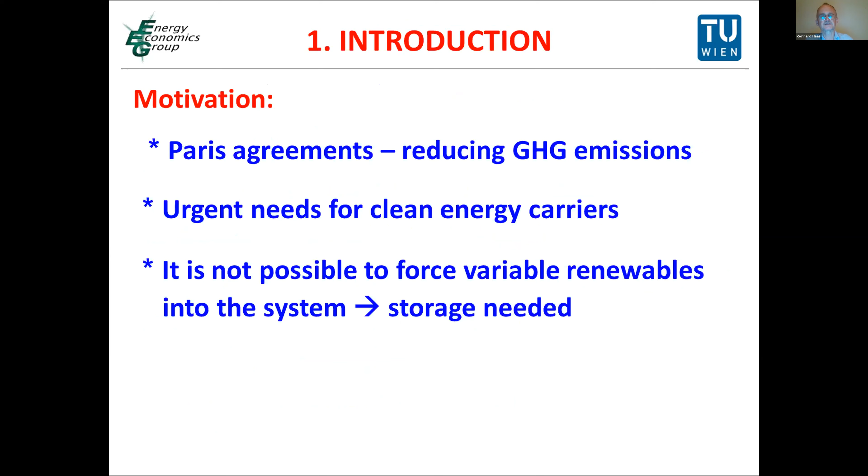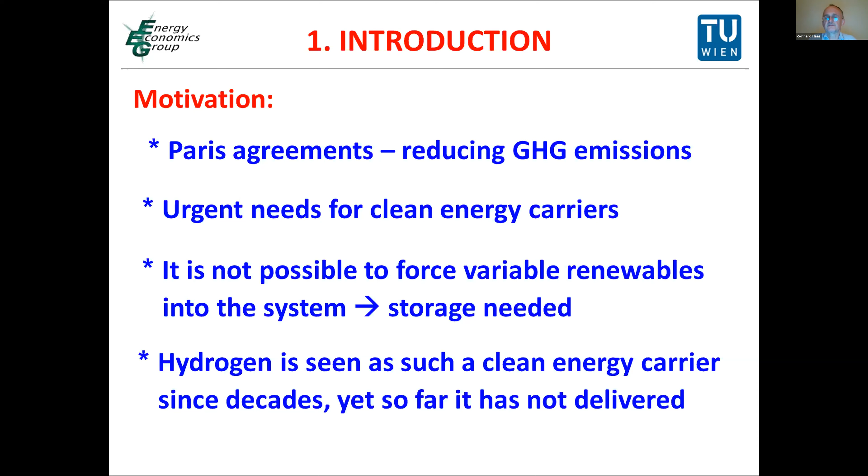The motivation is clear. We have the Paris agreements reducing greenhouse gas emissions, and there is an urgent need for clean energy carriers. We have, on the other hand, currently a strong development of variable renewables in the electricity system, and here storage is needed. And hydrogen has been widely seen as such a clean energy carrier for decades, but so far hydrogen has not delivered.

So the core objectives: to analyze the prospects and the impediments of the hydrogen-based system, to identify the role of hydrogen to integrate even larger amounts of variable renewables, to analyze how efficient technical solutions based on hydrogen can be, that is to say, what is the overall efficiency in different hydrogen energy systems, to investigate economic prospects, and, as said, also the environmental benignity of various colors of hydrogen.

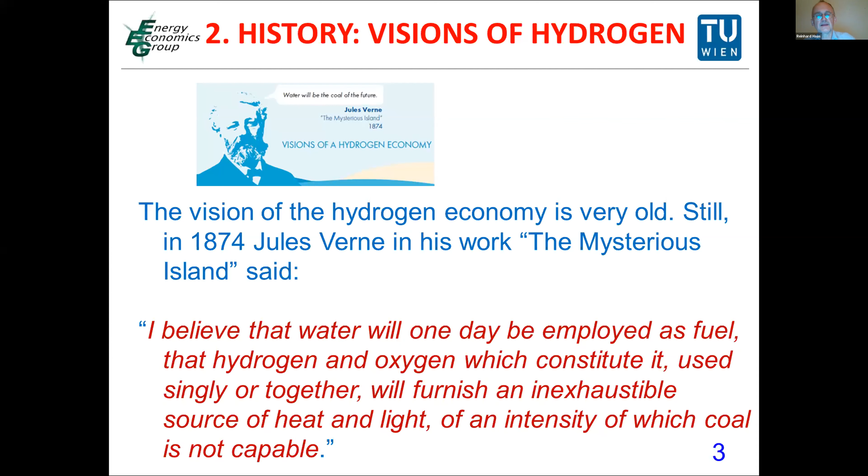The first fuel cell vehicle was a farm tractor in 1959. In 2011, there were already about 100 fuel cell buses worldwide, and in 2019, we had a global fuel cell vehicle stock of 13,000. And I would say this is not really a success story.

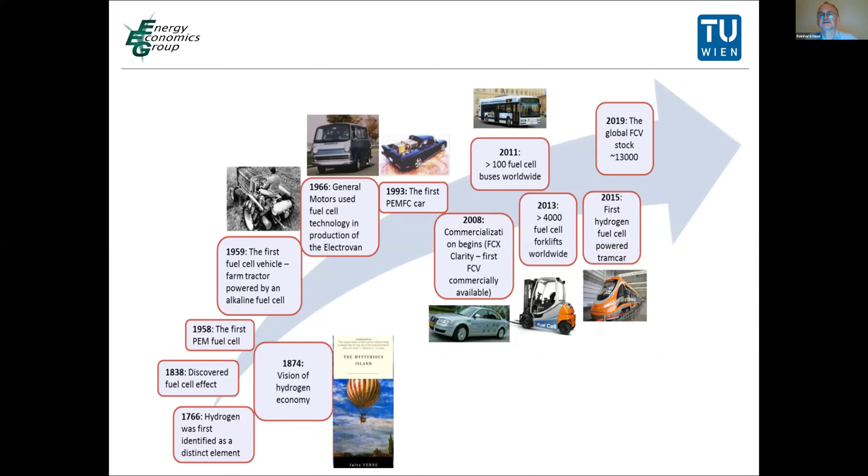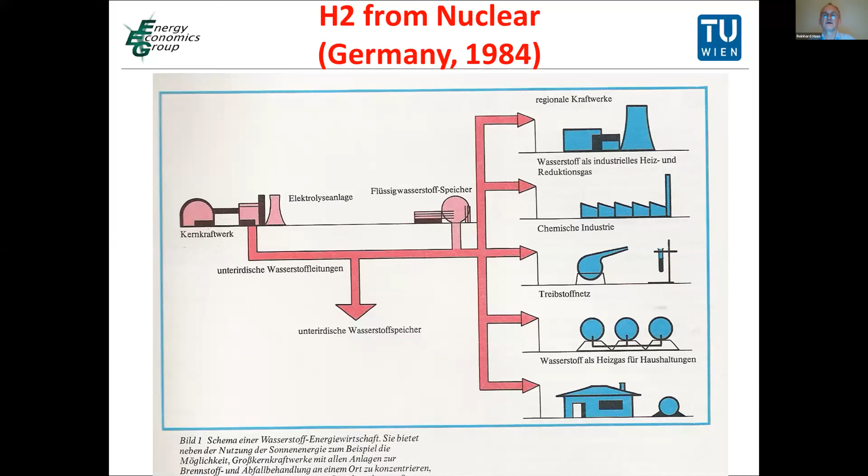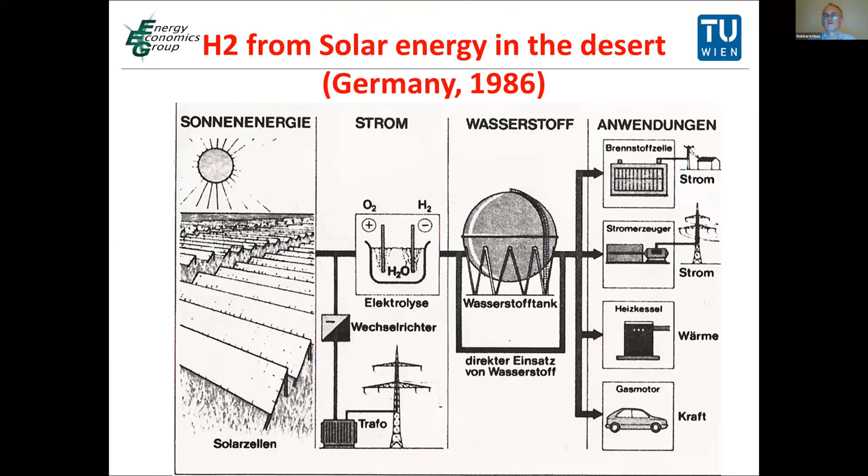The vision of the hydrogen society, for example in Germany, already in 1984 started with hydrogen from nuclear. The idea was that there's too much electricity generated in the nuclear power plants and they could use the electricity in electrolysis, and the further discussion is the same as today. And already in 1986, there was an additional idea to go to the desert, for example in Northern Africa, produce electricity there, produce hydrogen and transport it, for example, to Germany.

Another interesting idea came from the European Union. In the year 2003, they created a roadmap starting in the year 2000 with a fossil fuel-based economy heading towards a hydrogen-oriented one by 2050. There is, of course, a small mistake, because coal, fossil fuels, is a primary energy source, and hydrogen is an energy carrier which has to be produced from other primary sources.

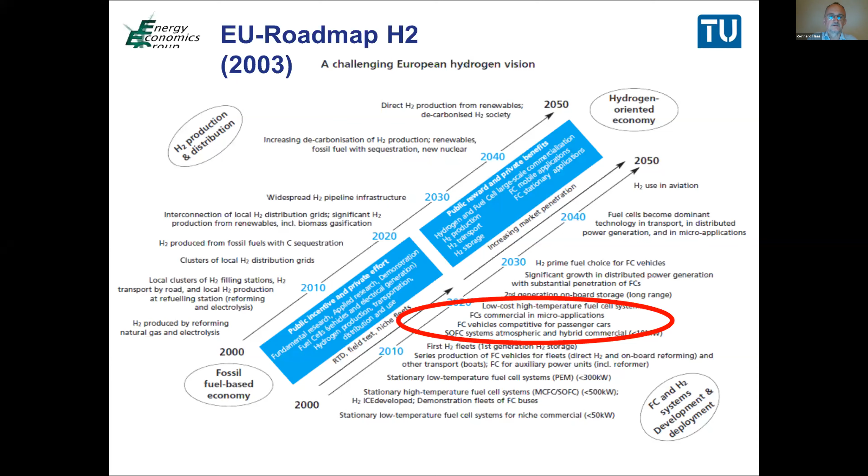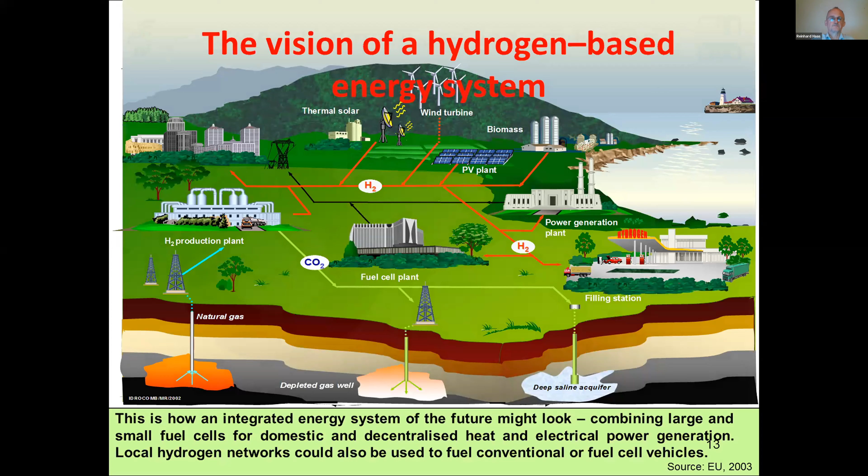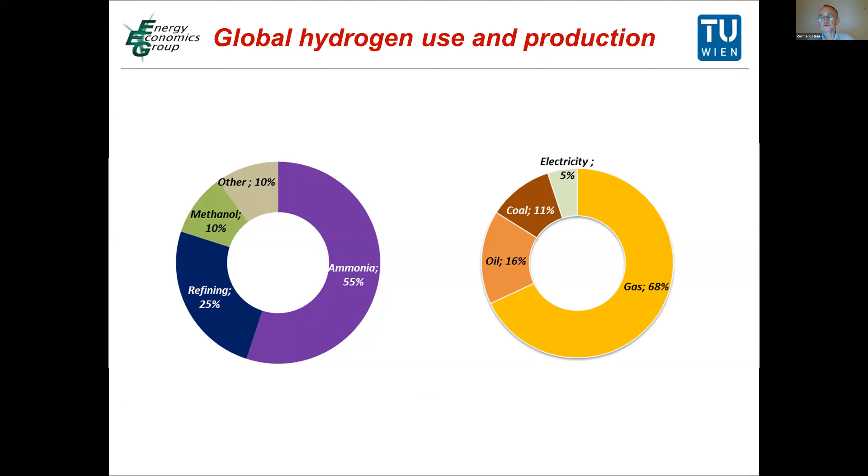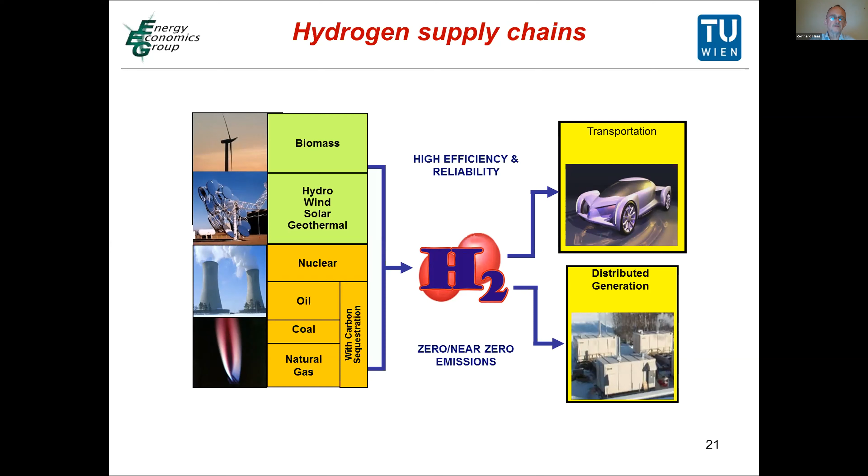Today, hydrogen is mainly used in refineries and for producing ammonia, and about 70% of hydrogen is produced from natural gas, only 5% from electricity. So let's now look at the hydrogen technologies. We have to bear in mind that we have technologies for hydrogen production, for hydrogen storage, and finally distribution, application in services. So we can see here we can produce hydrogen from biomass, other renewables, but also from nuclear and from fossil fuels with carbon sequestration.

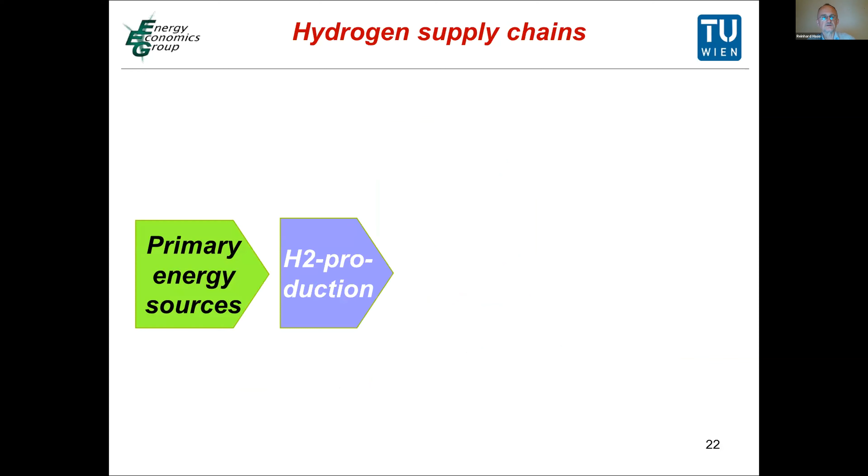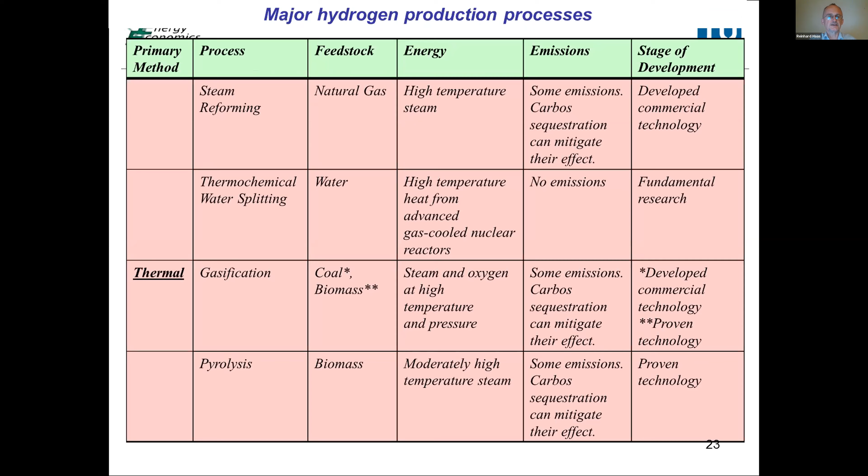That is to say, if we discuss the technologies, we have to bear in mind this whole chain from production, transport, storage, and also the applications. Just a rough overview. You need not read what we have on this table. It just shows that there are many possible processes. We have thermal processes such as steam reforming, gasification. We have electrochemical ones, such as electrolysis, photoelectrochemical, and there are also biological processes possible.

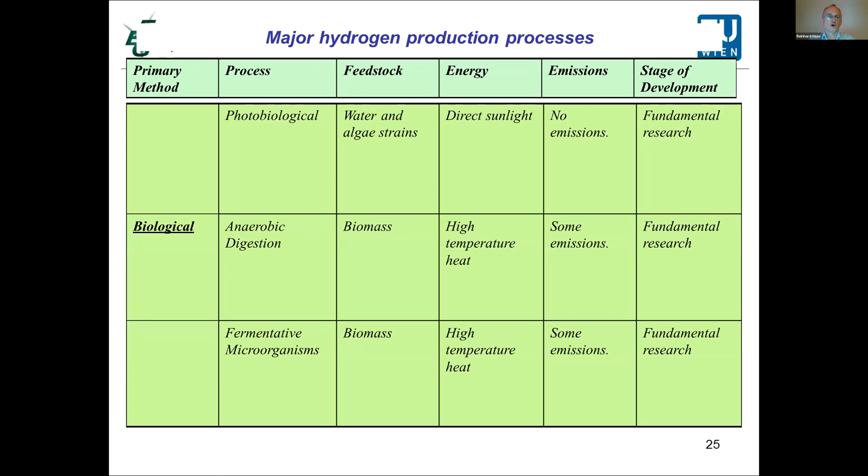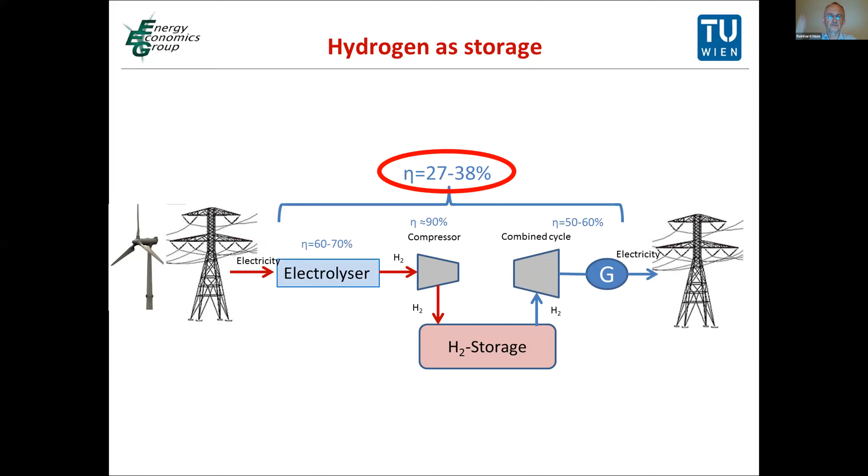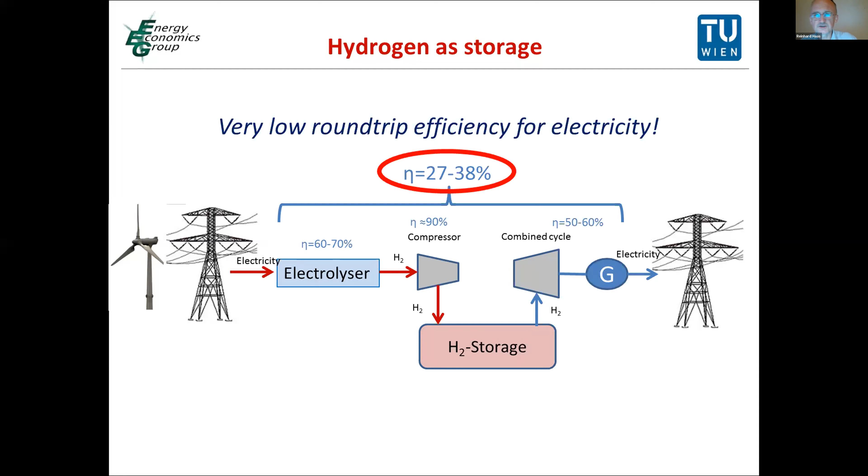Let's now look, first example, hydrogen as storage for electricity. In an electrolyzer, we produce the hydrogen and put it by compression in a hydrogen storage. Then we have the opportunity for re-electrification of this hydrogen. If we look at the different efficiencies in the system, finally we end up at about 27 to 38%, which is, let's say, at most modest. So round trip efficiency for electricity in this case would be rather low.

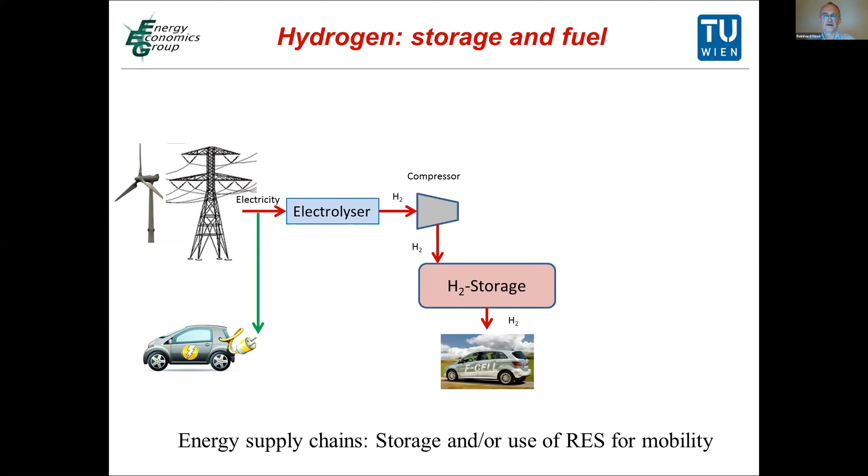Another opportunity is in transport. Aside from using the electricity directly for electric vehicles, we can have the hydrogen storage and drive the fuel cell vehicle. And finally, we also have the opportunity to do something that is called methanization of hydrogen. We produce methane for mobility, for example, or for electrification. Again, in this case here, we have an efficiency which is even lower than before because we have an additional conversion step.

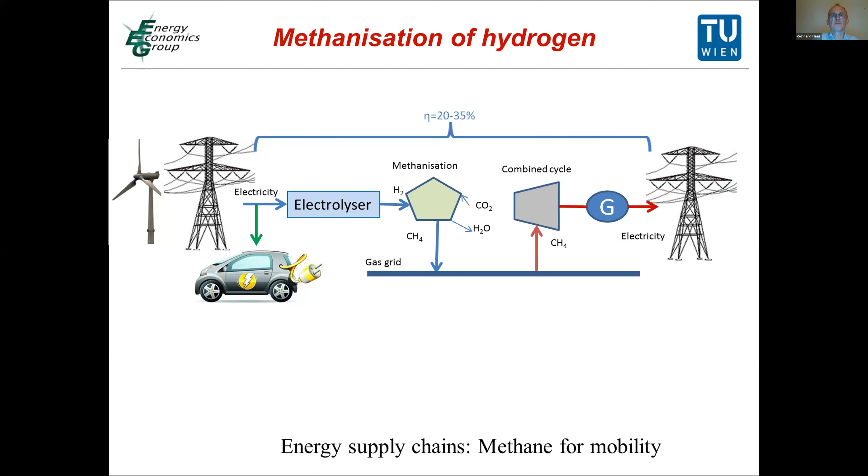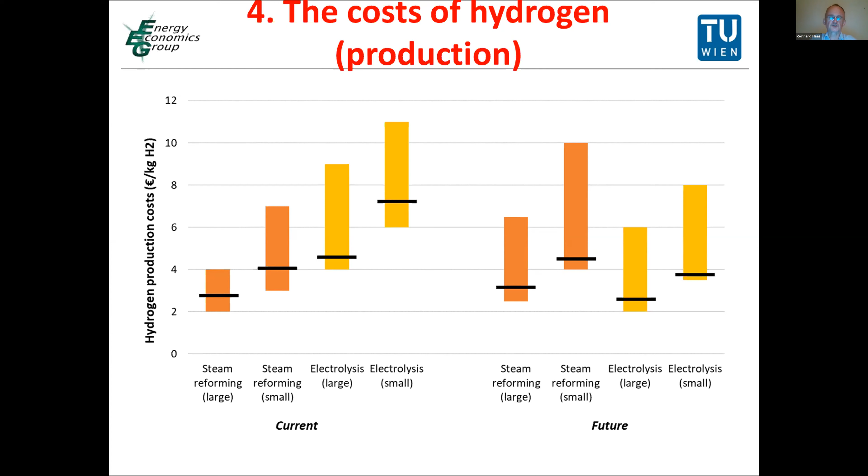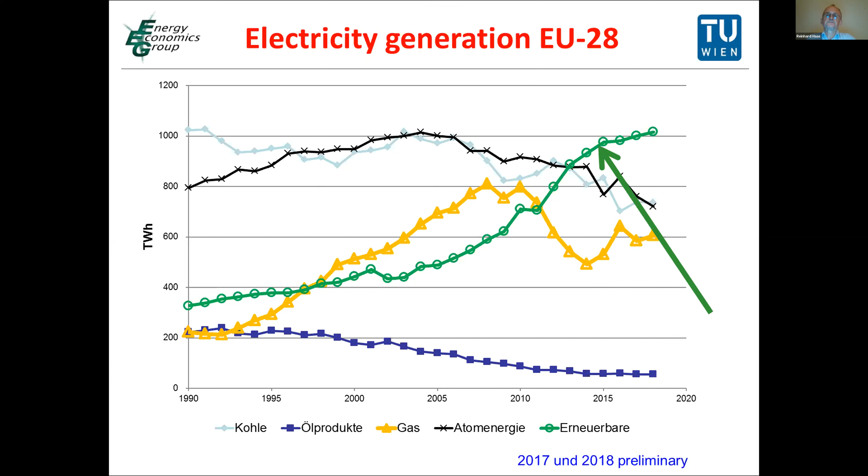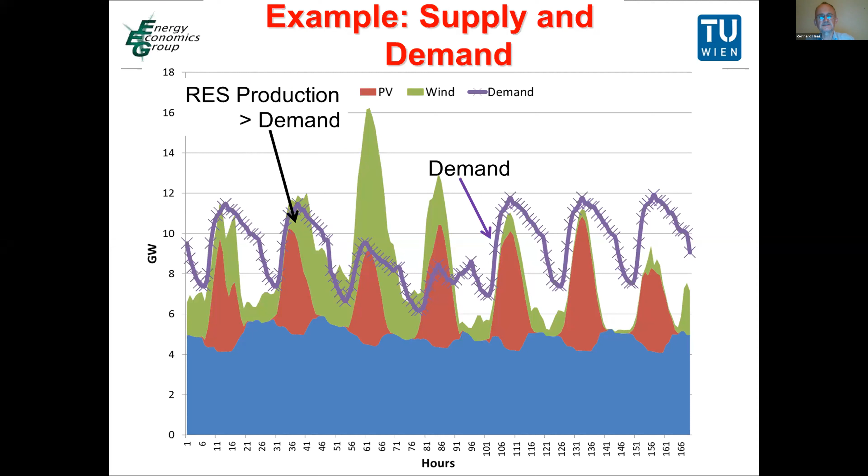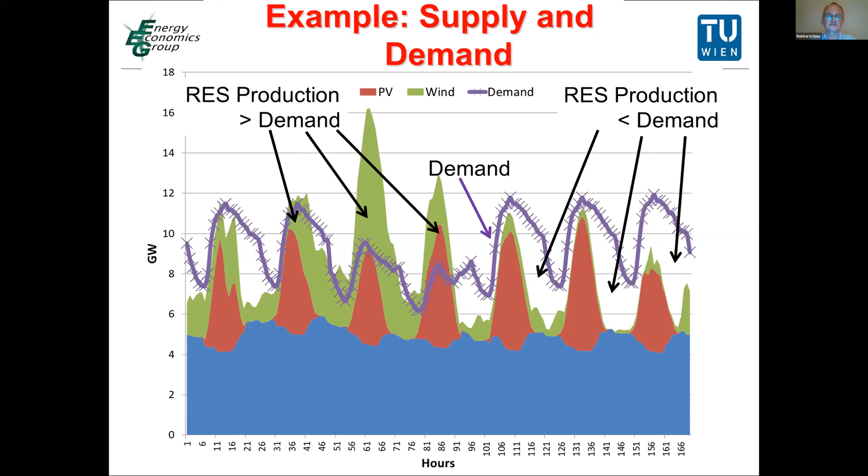But we have already heard in several other presentations, if we have the fluctuating production, then the picture is as shown here. Over a week, in this case for 2030 in a scenario, we have demand and we have times where the renewable generation is higher than demand, and we have other times where renewable production is lower. So we have to find for a week a certain storage.

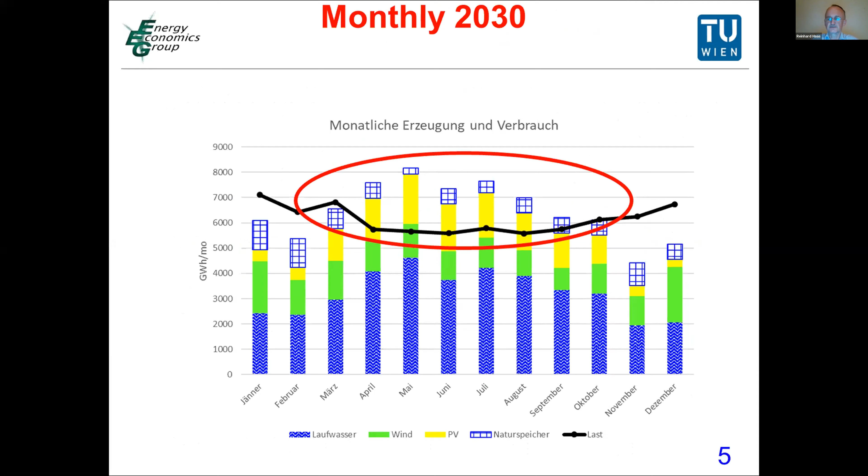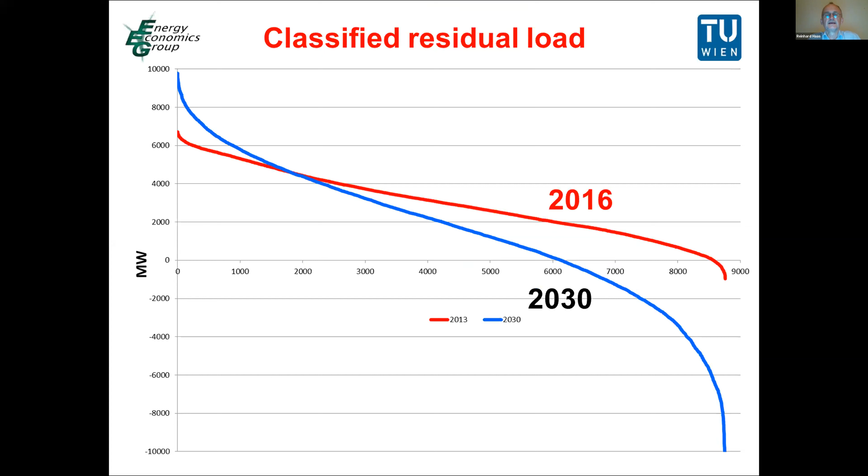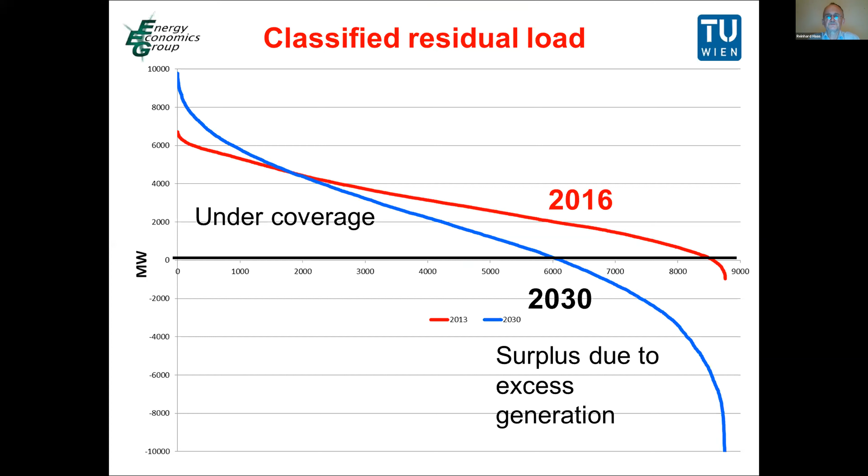If we classify residual load over years, we have here the classical profile for 2016 and an expected profile for 2030. We have here under coverage in some periods of time, and in other periods of time we have a surplus due to excess generation. And the question now is, how do we use this surplus?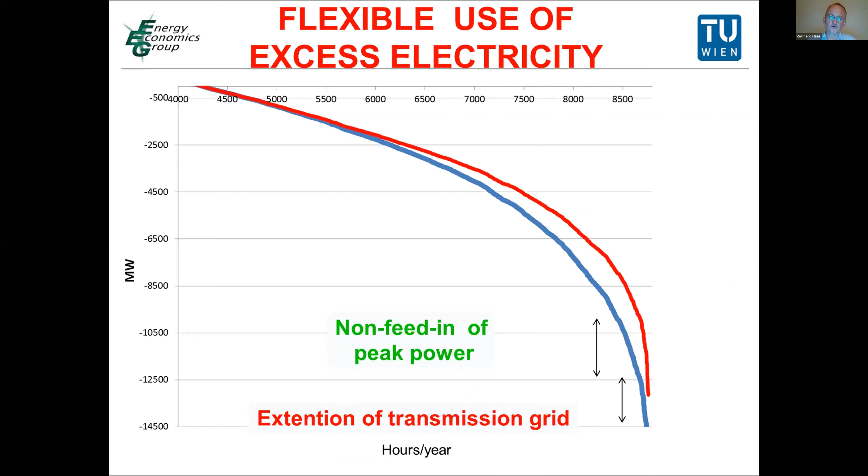We have several options. As also already said, we discussed the extension of the transmission grid. This will flatten demand as well as the generation curve. Then there is a possibility of shedding some peaks of plants, for example, of wind power plants. And we have maybe rather low prices. Then due to direct marketing, some of this excess electricity will be sold.

Technical demand-side management as well as the smart grids could help to balance from one voltage level to another one. And then here we have maybe the use of hydrogen storage.

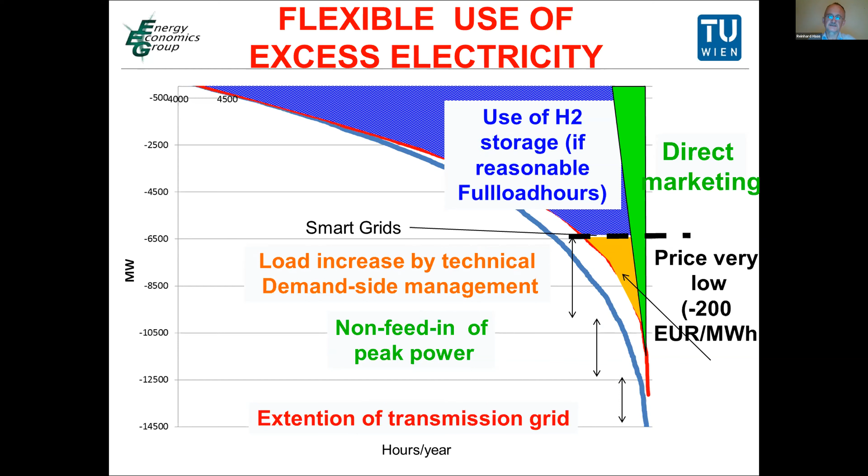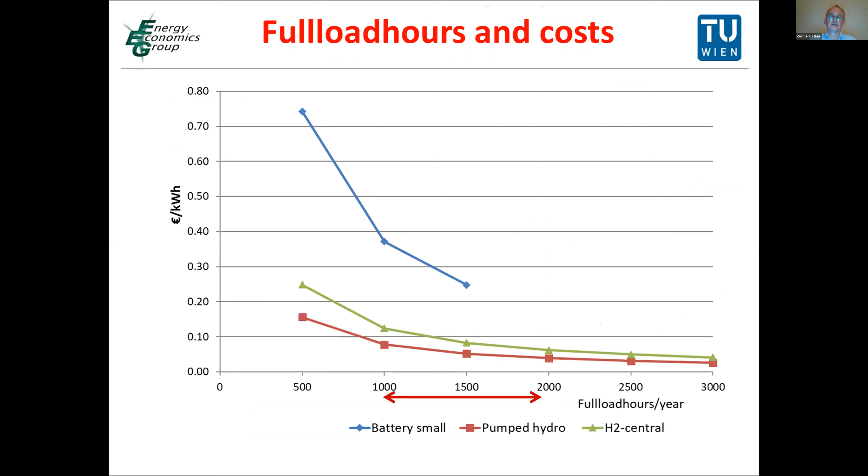But now we come to one of the very crucial points. It is full load hours. If you think about economics, the costs highly depend on the number of hours you operate the system. So here we have on the horizontal axis the full load hours, and we have different types of storage.

Usually battery storage has lowest operation times, especially decentralized ones, and for hydrogen we would expect at least, let's say, 1,500 to 3,000 full load hours. And in addition, this shows that at very low operation times of, let's say, 500, we have correspondingly rather high euro or dollars per kilowatt hour generation cost.

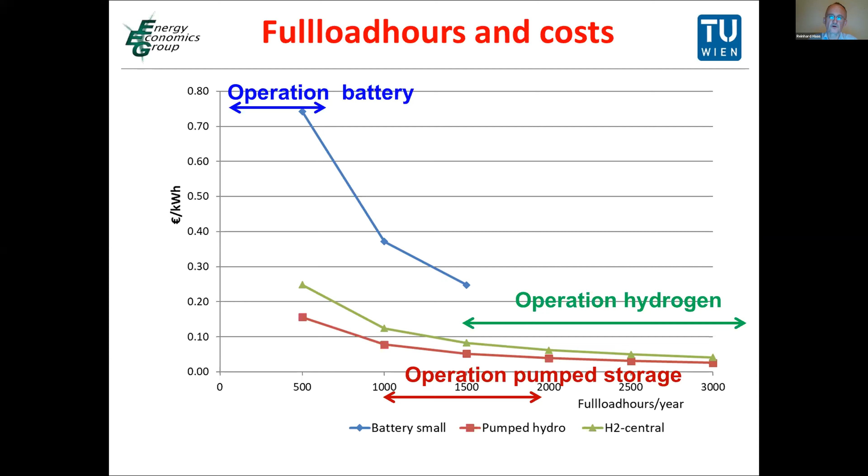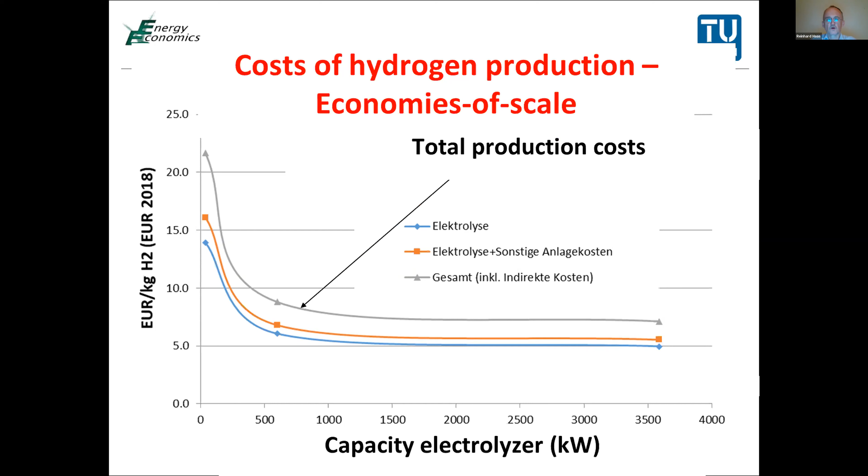And the gray curve here shows total production costs depending on the capacity. That is to say, it's not just the electrolysis, it's also other components of this system.

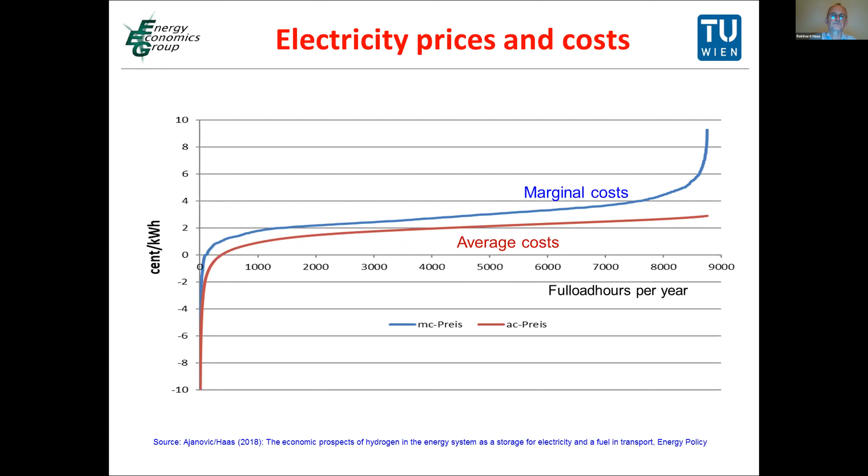It also is different from year to year, but we can now calculate the average costs, which are the average of the prices below a certain number of full load hours. For example, here at 4,000 full load hours, we can identify electricity costs of on average 2 cents per kilowatt hour. And I think there's not much difference between US cent and Euro cent.

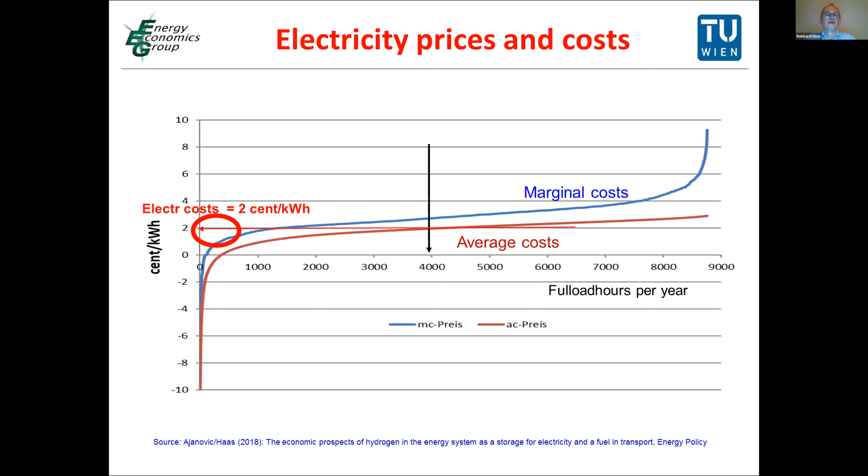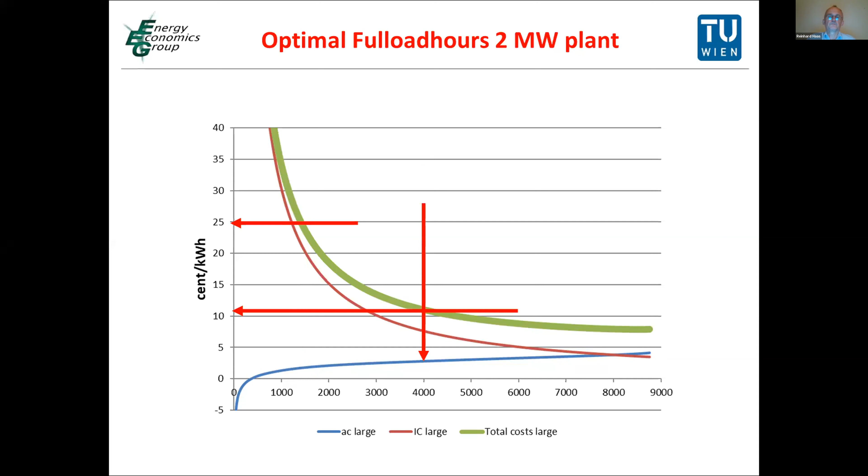If we just have 1,500 full load hours, the costs are 25 cents per kilowatt hour. If we would manage to come to 4,000 full load hours, the costs would only be about 10 cents. So we can see we have significantly lower costs in the case of more full load hours.

Now we can try to identify the economics based on these costs for car transport. And what we see from this slide is the fuel cell vehicle is on the top. Below we have battery electric vehicles, and we have gasoline internal combustion engine at the bottom.

What you see is that the fuel costs of hydrogen are actually in the average of everything, but the capital costs are still the major problem. So the economics in passenger car transport mainly depends on the investment costs.

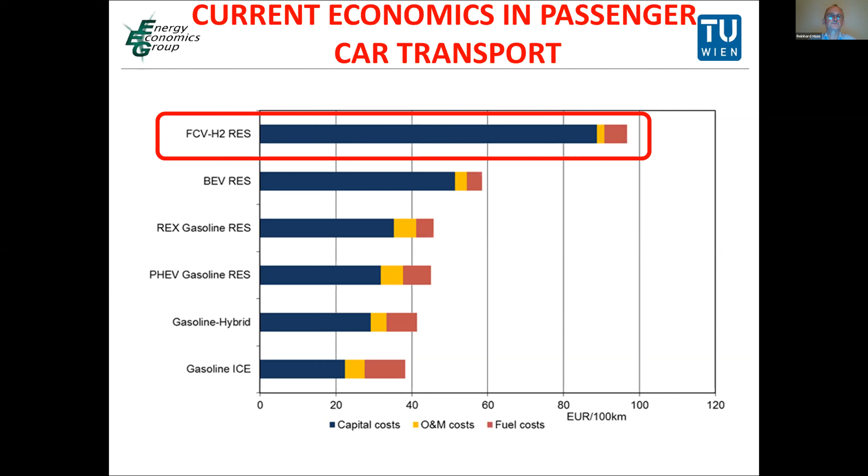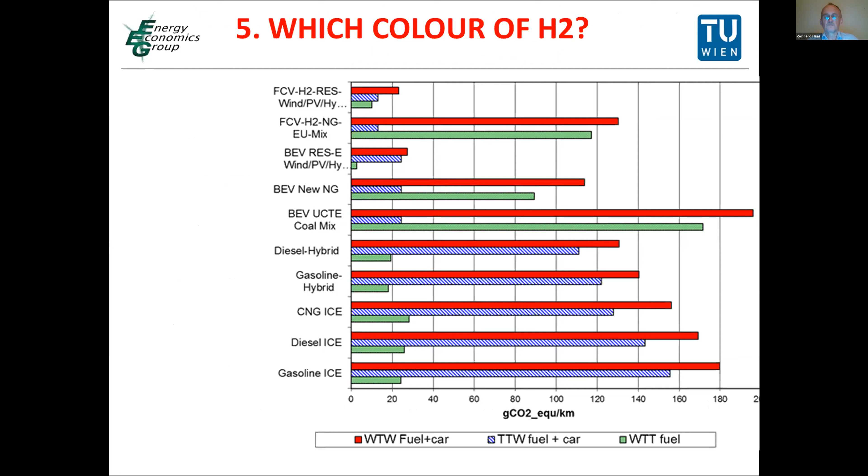Next, I have already mentioned this issue of the color of hydrogen. Of course, this is kind of a, let's say, joke. And the idea is that the environmental benignity depends on whether hydrogen is green. Green means it's just from renewable energy sources. It could be blue, which means it is from natural gas. There's also an idea of turquoise, and sometimes the definition is different, having this CO2 sequestration.

And at the end, we have, let's say, gray hydrogen. That is to say, we do not know from which source it is produced. It might be even from coal. So comparing again different types of car. Here on the top, we have fuel cell vehicles with hydrogen from renewables. And the red bar shows well-to-wheel, considering also the production emissions of the car.

And we can see that here we have quite favorable circumstances. On the top, fuel cell vehicles from renewables, and two lines below, we have battery electric vehicles from renewable energy sources.

But if we go to the second bar, we have natural gas, blue. That is to say, fuel cell vehicles with blue hydrogen based on the production of hydrogen from steam reforming of natural gas. And then we have significantly higher emissions, and the emissions are not very much better in this case than from other conventional vehicles.

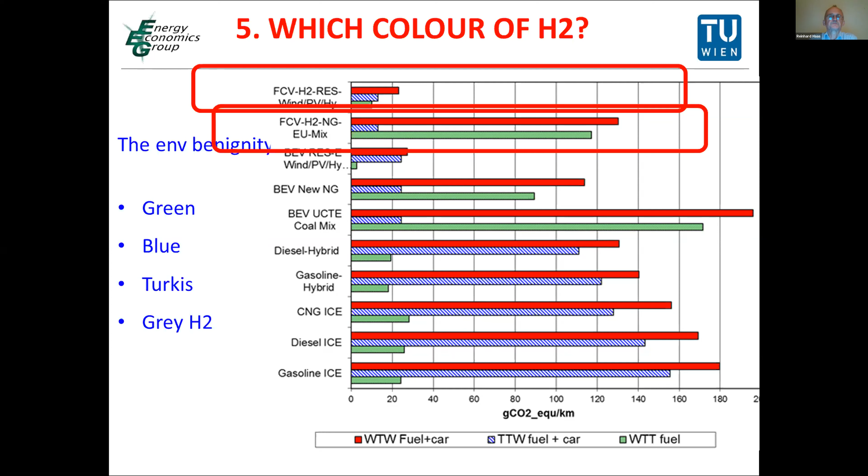That is to say, in principle, if we look at these environmental aspects, it is highly important that we strive for having it from renewable energy sources. Currently, there are different new applications underway. Currently, the largest electrolysis plant is built in Hamburg in Germany, from my knowledge, with about 100 megawatts. And it produces 2 tons of hydrogen per hour.

Next, we have the examples of the hydrogen buses. I think all over the world experiments are made. We have hydrogen locomotives to supply areas without grid connection with environmentally friendly trains.

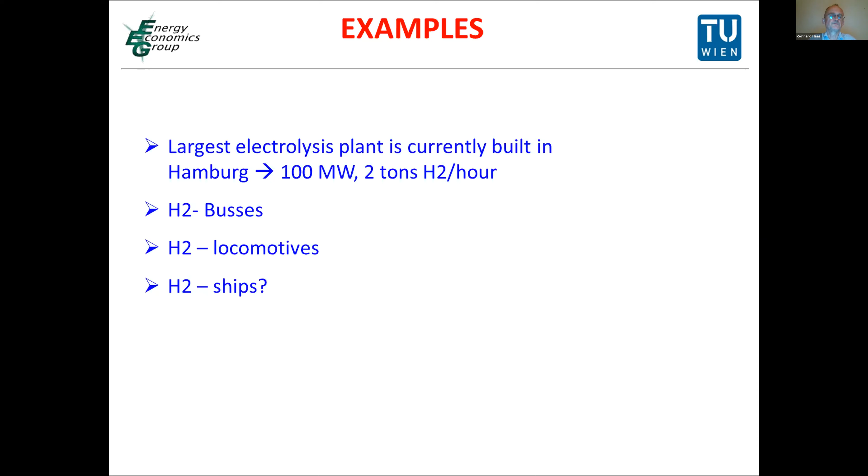And we have also the ideas for hydrogen making ship transport more environmentally benign, reducing the greenhouse gas emissions. These are all examples which are underway and are, I would say, currently continuously disseminated over at least the richer countries.

So next we come to what I call scenarios and technological learning. So in this slide, we have made some assumptions for, on the top, small systems, on the bottom, large systems. And the unit here is euro per kilowatt investment costs. So for both, we have low and high cases of learning rates. For low learning rates, they are about 15%, high learning rates about 22%. And you can see what we can expect based on some IEA figures for quantities, how these investment costs will develop.

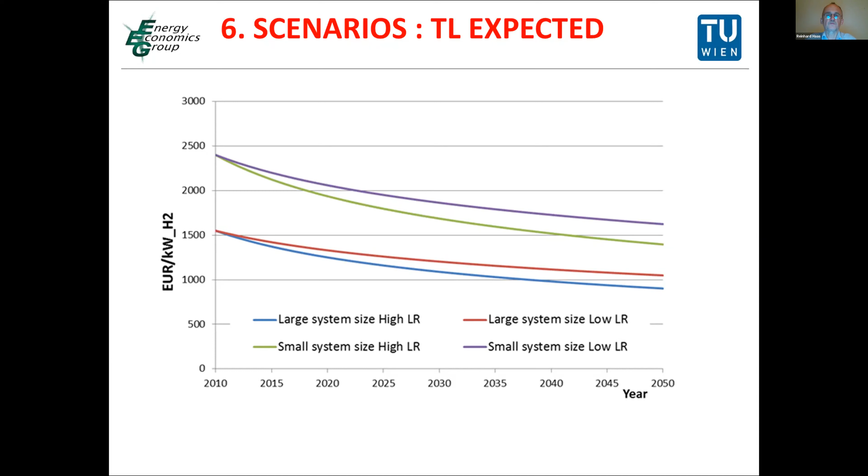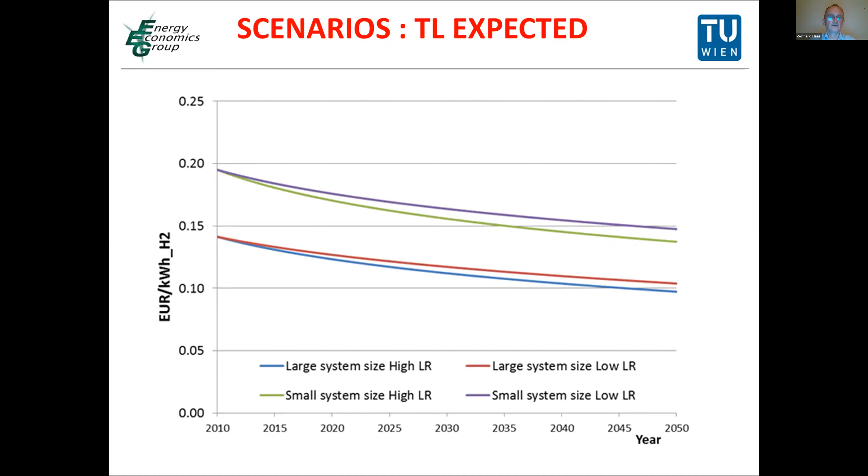And of course, based on the investment costs, we can now calculate the kilowatt hour price. What are the costs per kilowatt hour? And we have used the figure I have shown before of 2 cents per kilowatt hour electricity for this calculation, and in addition, the technological learning developments. So the result here is that by 2030, we might be at about 12 to 17, 18 cents, and by 2050, maybe in the case of a large system, even below 10 cents per kilowatt hour.

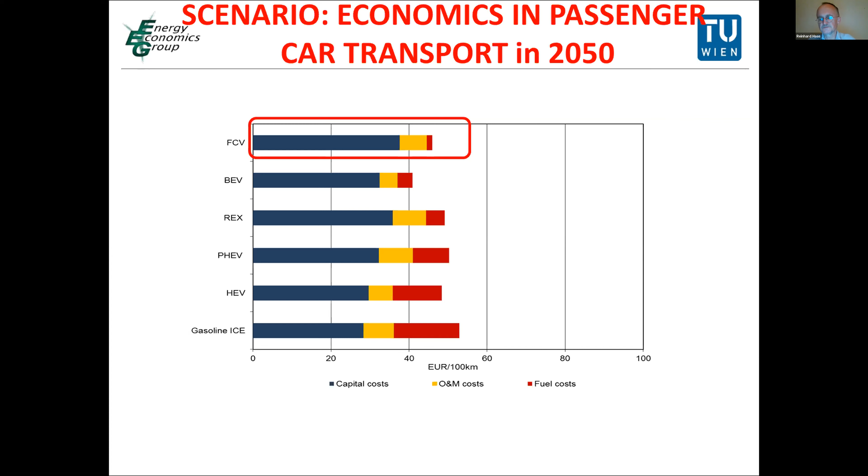If we consider this, we will have in 2050, with simultaneous technological learning of the fuel cell vehicle, the cost effectiveness for fuel cell vehicles. So this just considers the single types of vehicles, and it does not consider whether we will have other policies, for example, emission-free zones in the cities, and some countries even discuss bans of the diesel vehicles. So the major conclusion from this slide is that by 2050, several types of vehicles can have almost the same costs. But we need kind of policies, otherwise we would not have already a quite large market penetration of hydrogen.

And it is of interest to see which strategies and targets exist in different countries. Quite recently, we had in the European Union on 8 July 2020 launched a hydrogen strategy with the objective to decarbonize existing hydrogen production for current uses and to build also large electrolyzers up to 2030. China has launched a hydrogen strategy in 2019 with focus on hydrogen buses, trucks, and the country intends that hydrogen will account for 10% of the Chinese energy system by 2040.

In the US, you have since the 1970s, I think, hydrogen strategies and targets. It was, I think, started mainly in California. And last in this series, Germany announced in June 2020 a budget of about 9 billion euro for the promotion of hydrogen. And what is a specific point of interest, Germany wants to do it in a strong connection with Morocco.

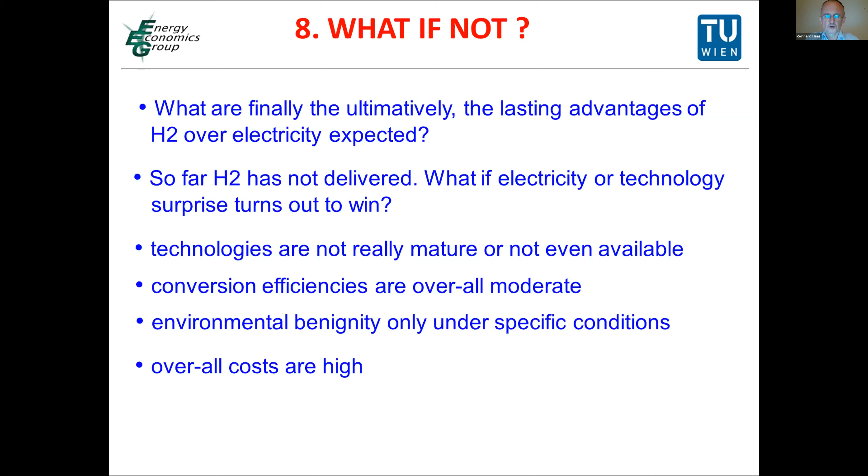The overall conversion efficiencies of the system are moderate. The environmental benignity takes place only under specific conditions, and I have tried to show this for electricity. So if you have the variable electricity from renewables, you have the problem of low full load hours. If you want to have better economics, increase full load hours, you may also use other sources for electricity generation. The overall costs are still high, and as said, the economics has still to be proven.

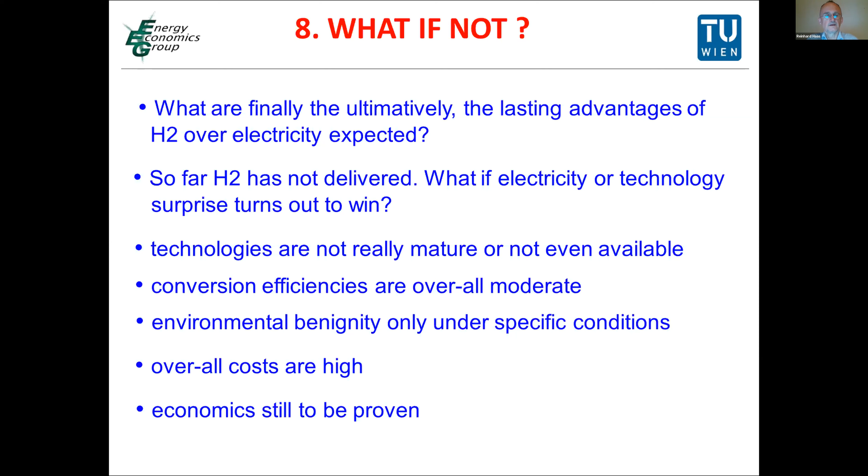This leads to the conclusions, which are rather questions. As already mentioned, are the technologies ready? This is quite an open question. Another open question is how to produce a huge quantity of renewable electricity. If we really want to have a hydrogen-based system, we cannot just take the excess electricity. We have to have a mainstream program to use the renewable sources. Another idea is that we could try to import hydrogen. As I said, the German example, they want to have the cooperation with Morocco and Africa. But if we want to rely on hydrogen imports, from which countries does it make sense?

Third issue is we are striving for competitive energy markets, and especially for competitive electricity markets, in addition also for more democracy in the markets. But can hydrogen survive in such a system, or is it necessary that the regulators interfere? Another point is the role of a CO2 price, different in different continents and countries. Then we have the issue of infrastructure. Of course, in principle, not very cheap new infrastructure will be needed, but partly maybe the existing one for the natural gas grid could be used. However, this is also to be discussed.

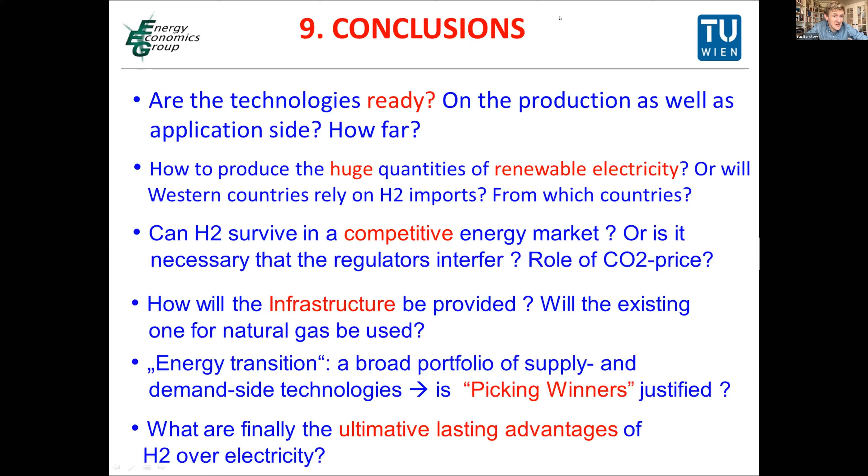but there are various experiments underway. In commercial situations, there are not many really practical projects. So I would have to go more into detail to answer this question more precisely. Mike, I hope that answered your question. I guess the answer is it's complicated, and you should avoid storing it too long.

I don't want to ask a leading question, but I guess I will. Does that mean that hydrogen isn't really a practical technology for long, say, month or annual energy storage? I think you have to try to optimize the system, because you also have losses in the storage, you have losses for the transport. This is one of the major goals currently in the practical experiments, to find an overall solution for the system. And it also depends finally on the final application. In the iron and steel industry, they try to produce the hydrogen on site and use it as soon as possible.